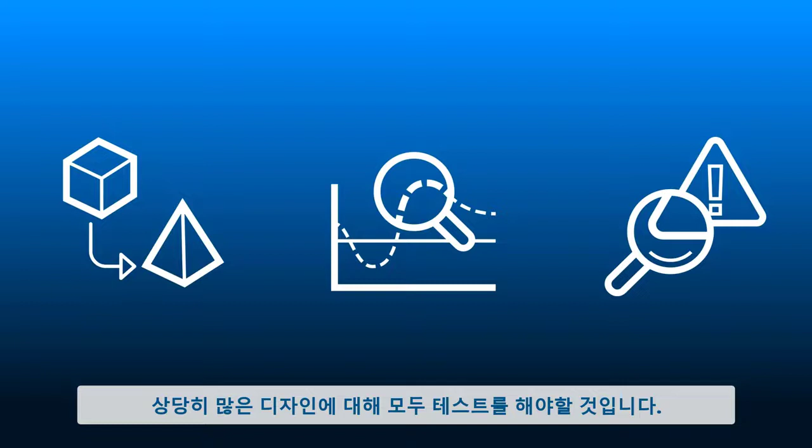When you test your products virtually or in the real world, naturally you're exploring numerous design options, evaluating how long they will last, and finding out when and where ultimate failure may occur. And it's no easy task. When simulating numerous physics and loading scenarios, collecting and making sense of all the data can be daunting and time-consuming.

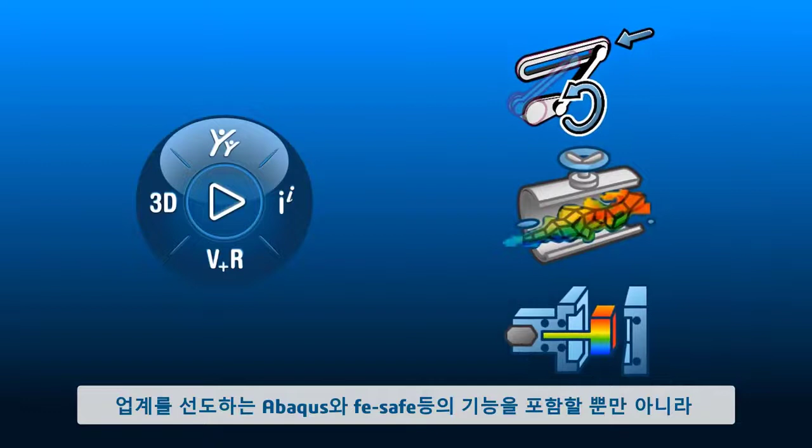This is especially the case when the design and analysis tools are disconnected or limited. But there is a better way. The 3DEXPERIENCE platform provides a collection of best-in-class simulation apps built with industry-leading technology, including Abaqus and fe-safe, and connects seamlessly with SOLIDWORKS.

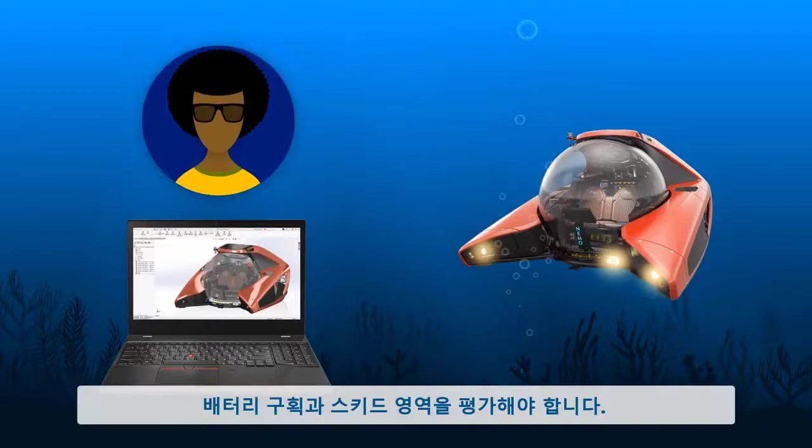Adam Analyst is working on the Nemo submarine to help satisfy their safety and certification requirements. When it comes to the battery compartment and skid, he has a few remaining tasks. With a depth rating of 100 meters, it is critical that the battery compartment can withstand the pressures beyond that depth to ensure safe operation.

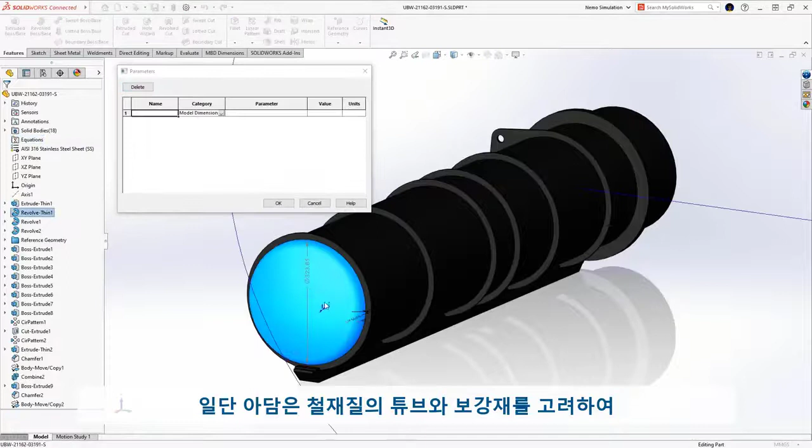At the same time, weight and cost must be reduced wherever possible. Adam considers the thickness of the steel tube and stiffeners, and defines the associated dimensions as parameters to be optimized. He saves the updated model to the platform and launches the Model Assembly Design app to start the simulation process.

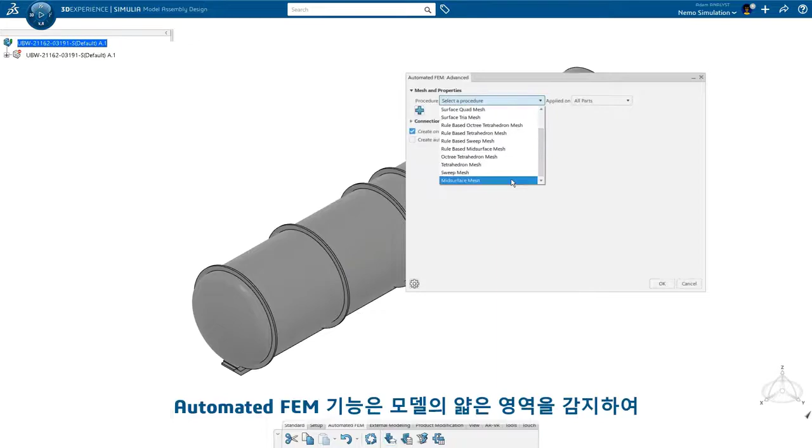First, a mesh is created. The automated FEM recognizes the thin components of the model and creates mid-surfaces and associated shell mesh bodies all in one command. Next, Adam creates the structural scenario that defines the loads and boundary conditions to simulate the maximum designed depth rating.

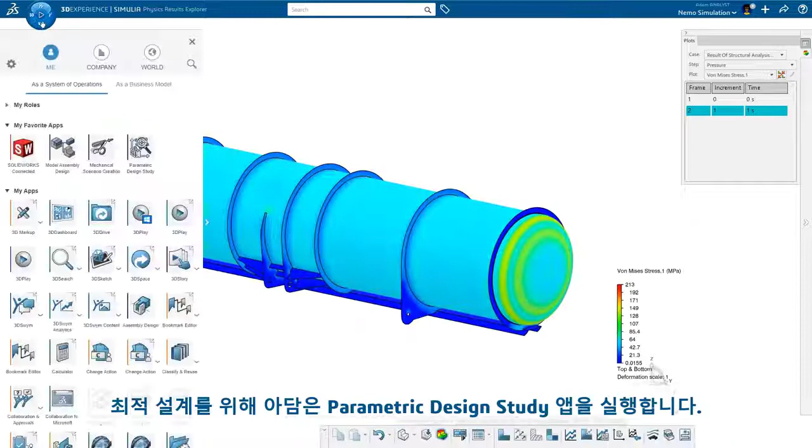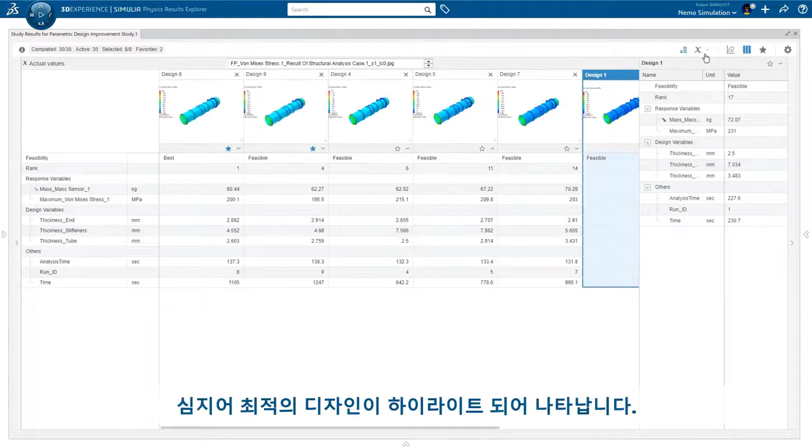At first glance of the results, it is obvious the structure is over-designed. Adam launches the Parametric Design Study app, selects the parameters and goals of interest, and lets the computer do the rest of the work. When the study is done, Adam can easily interpret and compare the performance of the various configurations. The best design is even highlighted for him, and with one click, a new model and study using the optimal parameters is created, so Adam can take a closer look.

But he has additional tasks to complete first. The pressure load on the battery compartment happens multiple times throughout the life of the Nemo. Another loading condition that repeats is the impact of the skid landing during storage.

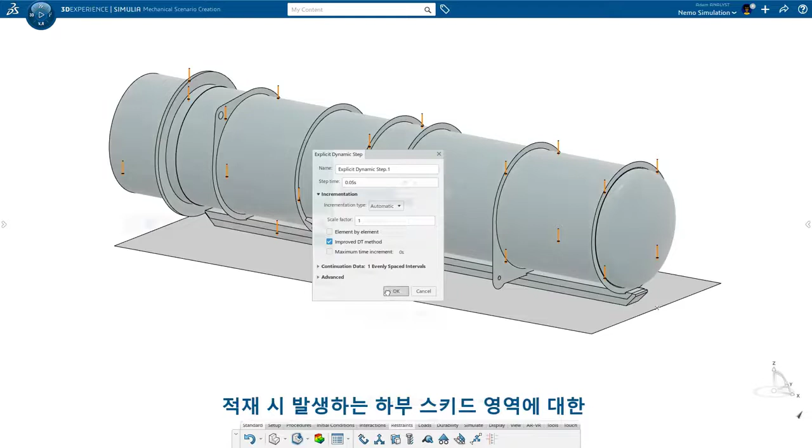To simulate this secondary loading condition, Adam creates an explicit dynamic study to accurately capture the rapidly changing stresses of the landing cycle. How exactly does the skid come in contact with the floor? Adam lets the solver figure that out with one simple yet powerful general contact interaction.

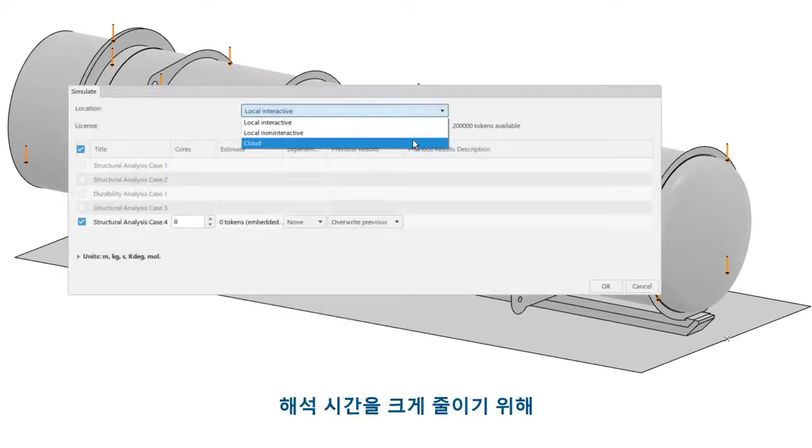To greatly decrease the solve time, Adam chooses to run the simulation on the cloud, leveraging its high-performance computational power. Adam can even shut down his computer while the simulation runs.

The stress values are within an expected range, but how many times can the Nemo withstand both this and the pressure load? To reveal the answer, Adam sets up a durability study.

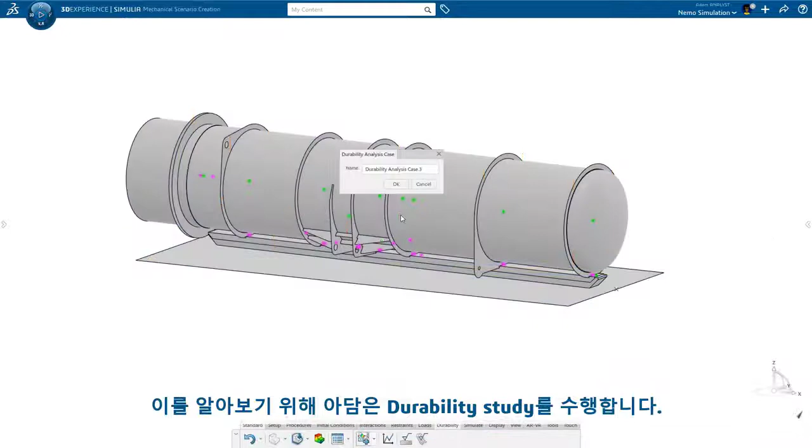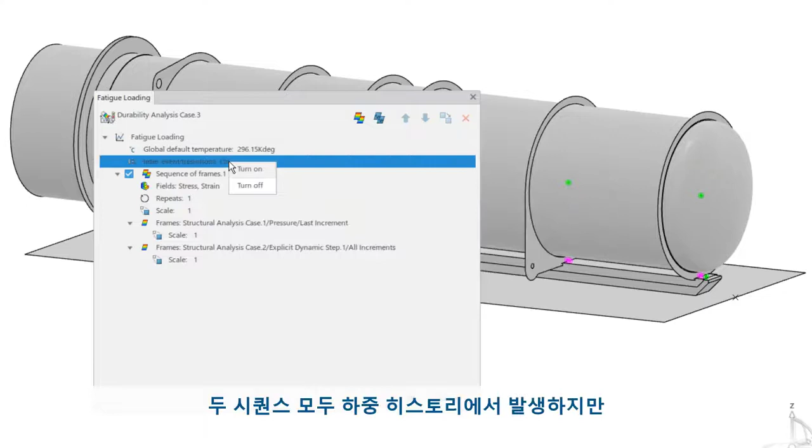He defines a fatigue loading that captures both events. For the explicit dynamic results, he includes all increments to account for the fluctuations in the response. Adam also includes both stress and strain in the calculation to improve the accuracy and solve for both high and low cycle fatigue.

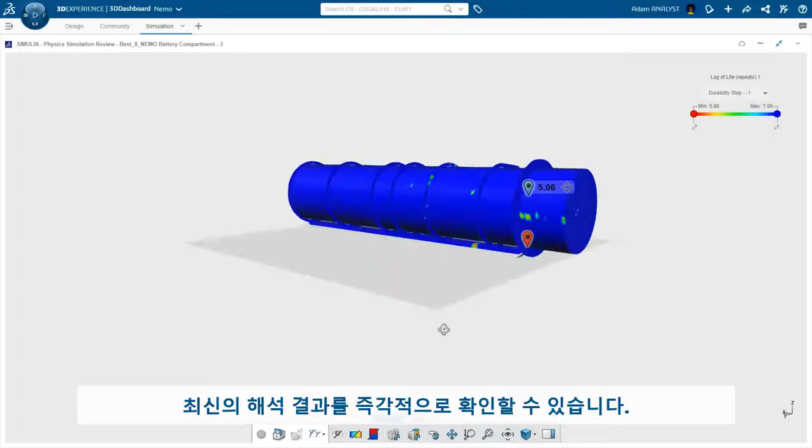Both sequences occur in the loading history, but they are exclusive events, so he turns off the inter-event transition option. Lastly, he defines the base surface finish and solves for the results. The results are not only available to Adam, but they may be viewed by other collaborators from their internet browser, so everyone can get the latest information instantly from one place.

Adam's last task is to identify when and where ultimate failure may occur if the Nemo gets too deep. Leveraging the same study setup from the first scenario, he defines a Riks buckling step, which goes further than the typical eigenvalue buckling analysis, and it's well suited for an unstable and nonlinear collapse of the structure.

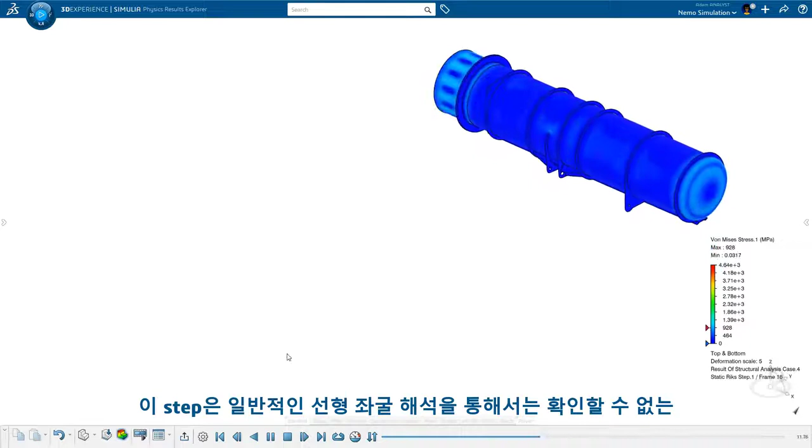And it doesn't require setting up a more complex dynamic analysis. Processing the results is simple too. Adam plots the load factor and visualizes which areas of the compartment will fail first.

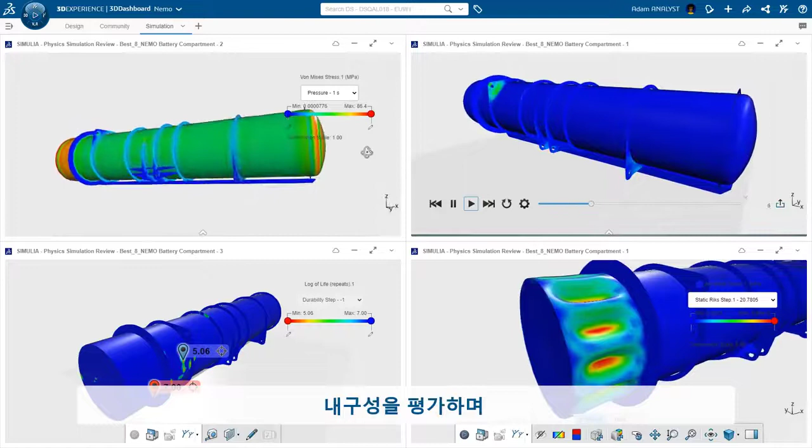By using the 3D Experience platform to explore numerous design options, evaluate durability, and understand critical loading events, Adam and his team were able to make informed, timely decisions to help fulfill their safety and certification requirements.